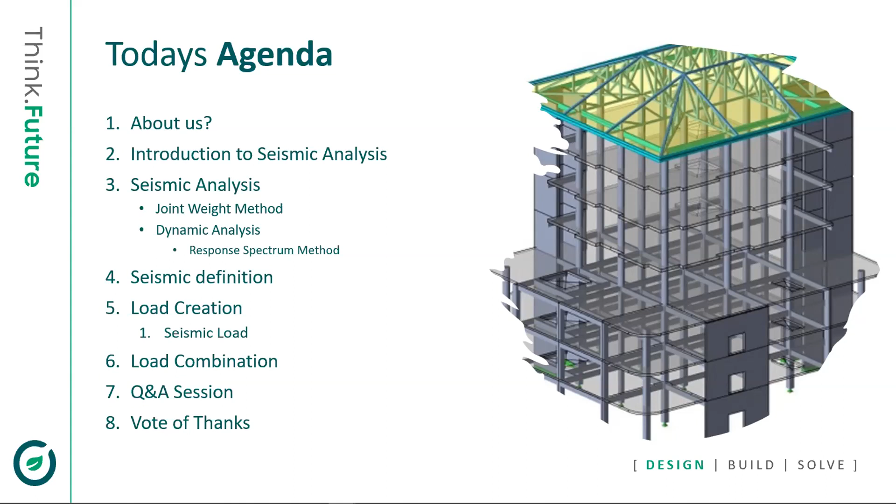So Capricorn Technologies has a legacy of over 3 decades now. Capricorn has played a significant role in the country's computer-aided design adoption, and today we are concentrating on information modeling to address the start-to-finish design and construction difficulties faced by the building and infrastructure industries. We deliver the finest solutions, methods, and procedures to enhance your productivity and reduce your project risk. Our team of more than 250 plus designers based in all the major cities have constantly provided outstanding value, adoption, support, and services to optimize the true potential of more than 20,000 plus customers.

Capricorn Technologies is now a Win0 company. On April 6, 2022, we became a global company with a footprint and impact globally. We have recently merged with 4 international companies: first US CAD from the US, second Cadline from the UK, Capricorn from India, and ATP Technologies from Australia.

So Win0 is dedicated to educating its users about how the technology they employ now can assist them in moving towards net zero in the future and creating a better, sustainable society and greener future. Win0 is known for its inclusive culture of putting people first and passionately resolving customer difficulties. So this was all about us.

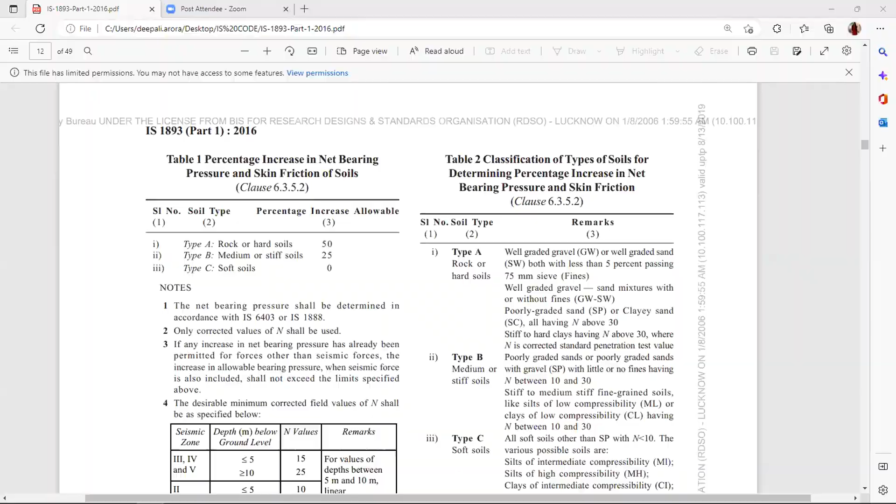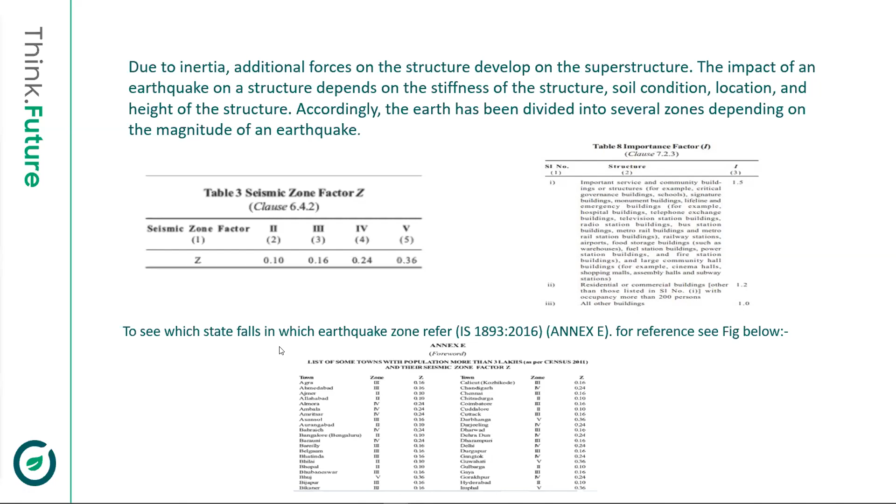So let's start, and I'll directly switch to my software. Just give me a moment to share my software screen. I hope my screen is visible. Kindly confirm. Yes, it's visible.

Okay, so for today's session I have created a G+6 story building. For those attending this session for the first time, in the first two workshops I already covered the basic part, which is assigning the loads and creating the loads, creating the geometry. So to view that previous work, you can go to our YouTube channel as well. All the recordings are available there.

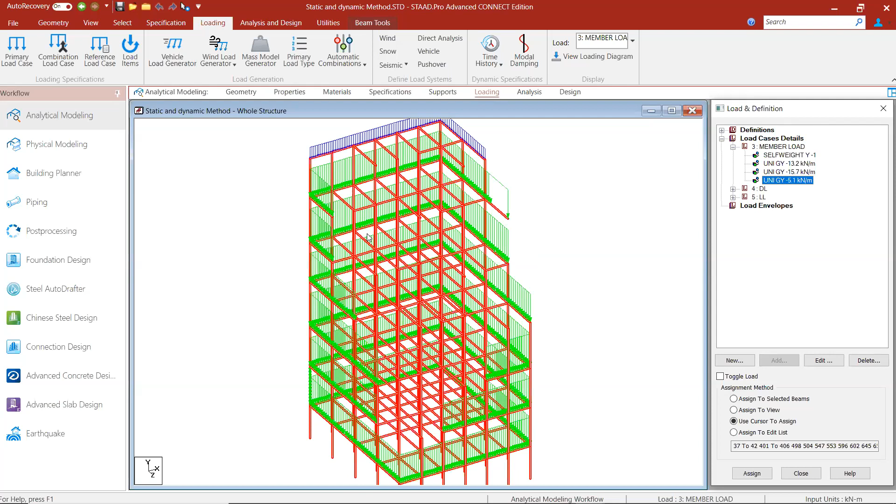So today I'll be directly switching to the definitions part. I have already defined these loads. First is the dead load - member load is nothing but the dead load, so self weight of the structure I've applied. I've applied the wall load, so these are the different wall loads for different floor-to-floor heights, and these are the dead loads. For example, I have kept the load the same, but with your live projects it might not be the case, so I've kept the load cases same. This is for the live load - so all the basic loads I have applied.

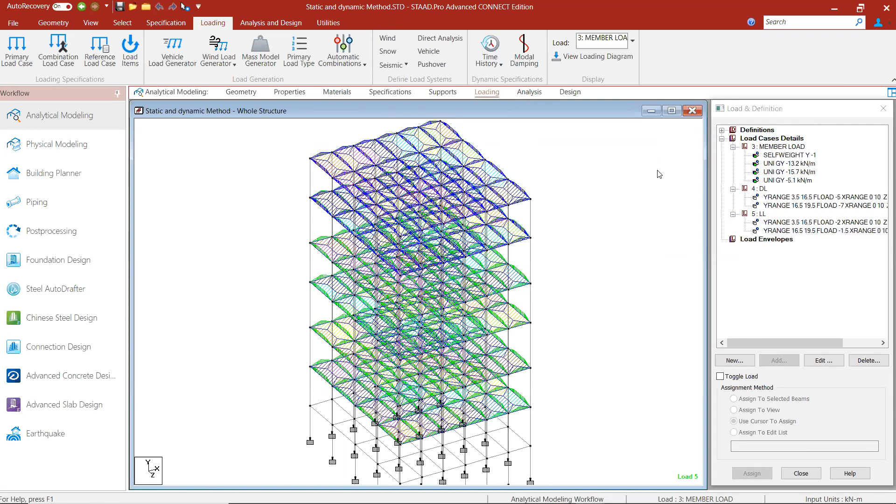Now moving on to the first method, which is the joint weight method. So what I'll do is first assign the supports. I've already assigned fixed supports, but now I'll assign pin supports, because for the joint weight method we need to calculate the weight coming on each node and beam junction. So to do that, I'll go to supports.

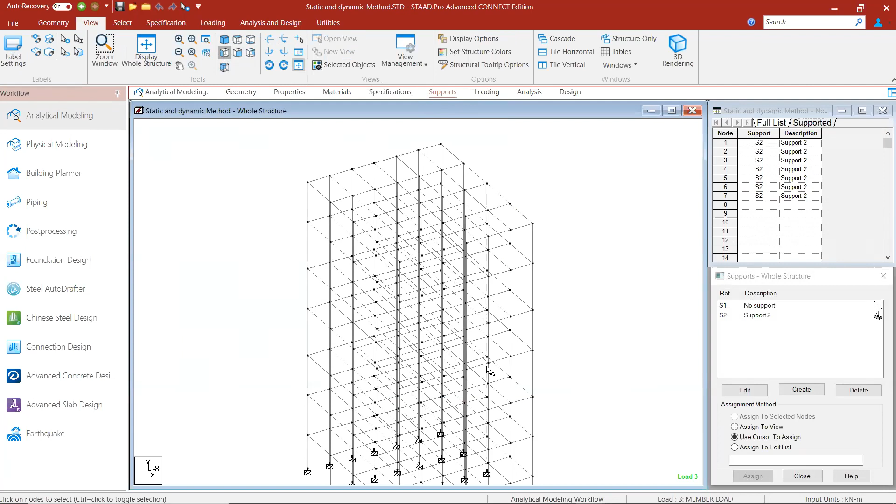I'll click on view and select the left view, and select all the columns. To select all the columns, I've pressed the select ribbon tab, and from the beam section, I'll click on parallel and select parallel to y-axis. Now I'll go to view and select the selected objects.

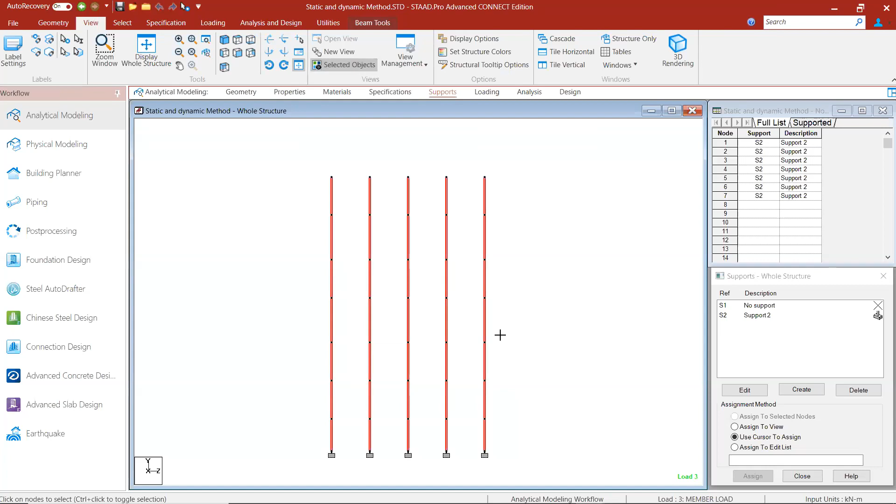Now moving on to create pin supports. I've clicked on supports, and after clicking on create, I'll click on this pin support. I'll add the pin supports to all the node and beam junctions above the foundation level. I'll click on assign and yes. See, all the pin supports have been assigned.

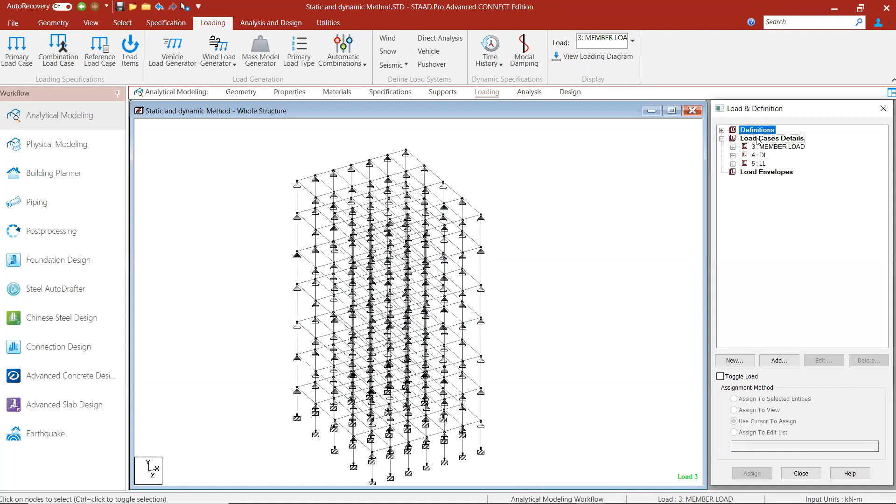Now moving on to how we will calculate the joint weights. To do that, first I'll create a load combination which will combine all these three loads in one. So I'll click on load case detail.

I'll create a load combination by clicking on define combination. I want to keep the load number as 100 and write the name as dead load plus 0.25 of live load. As per our Indian standard code, if the live load or imposed load is greater than 3, we have to assign 50% of the live load. If less than that, we assign 25% of the live load. So I'm taking 0.25 of live load.

It's important to take all these load cases in the same manner we wrote our combination - first dead loads and then live load. Here I'll change the factor, which is 0.25. I'll click on add, now click on close. This load combination has been created.

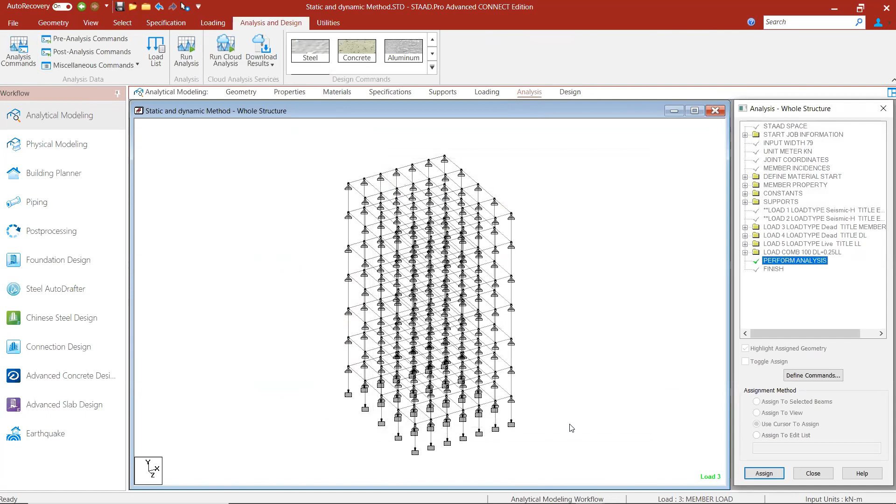Now I'll click on analysis first, and here I will add the command for perform analysis. Perform analysis and close. Now I'll simply run my structure.

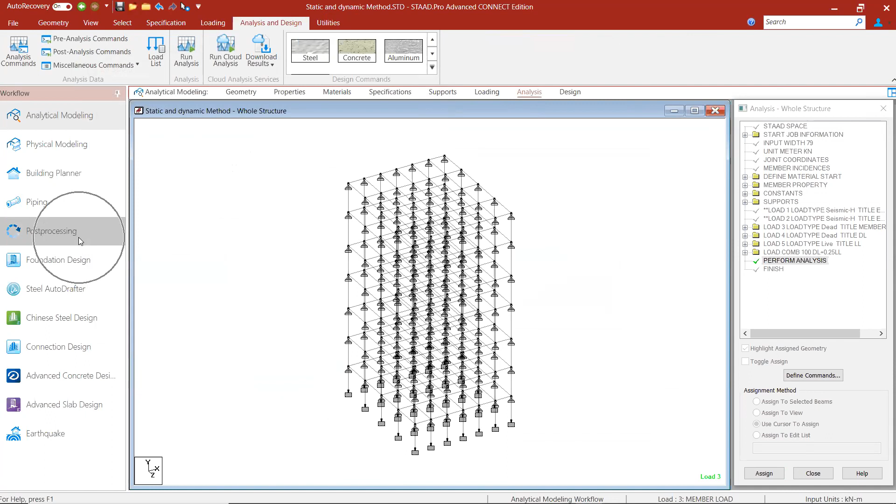Now with 0 errors and 0 warnings, moving forward, I'll click on post processing to see the support reaction table. For the results, we go to post processing. I'll click on post processing, and from here I'll choose the combination we created for joint weights.

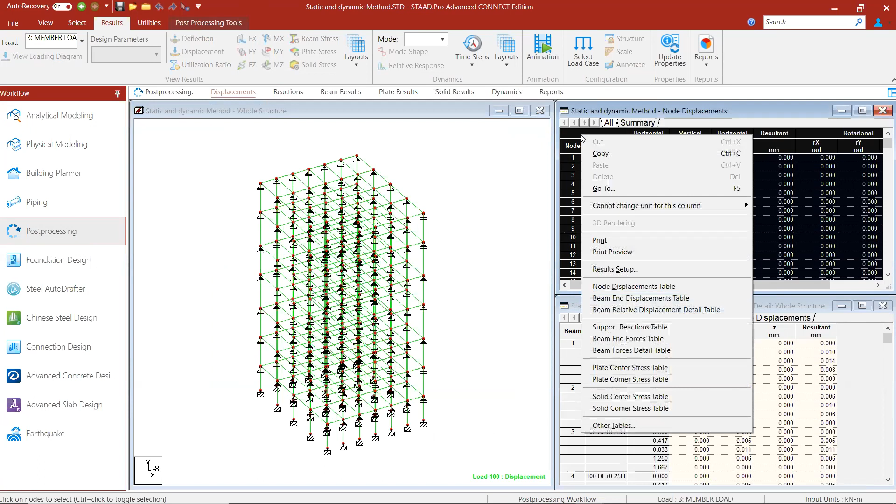Either I can click on this table, and with a right click on the mouse, click on support reaction table, or from the layout option in node results, I'll click on reactions. This is our support reaction table. Suppose I'll click on the support reaction table.

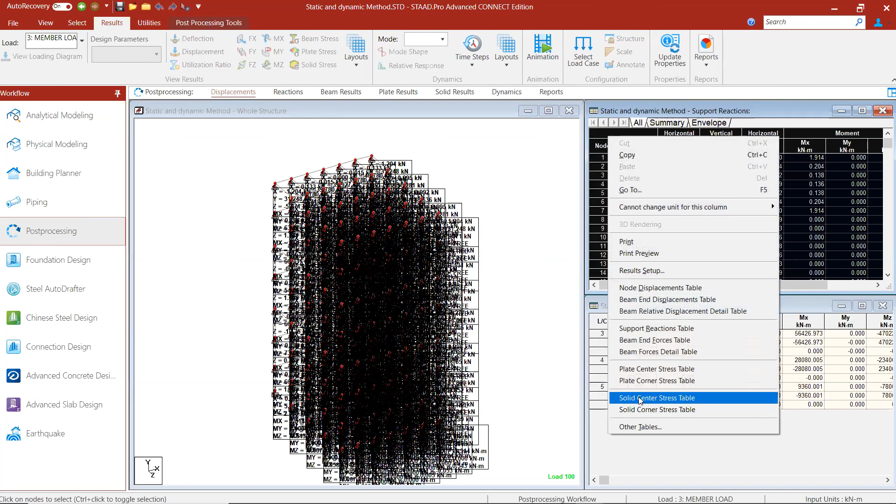I'll click on copy, open my Excel sheet, and paste this result over there. I'll paste these results one more time.

Instead of this load combination, what we have to do is write 'weight' here. Otherwise it will show an error in the STAAD editor file when you try to run the analysis. And for the joint weight, we only need the vertical forces, so I'm keeping this FY forces and deleting the rest.

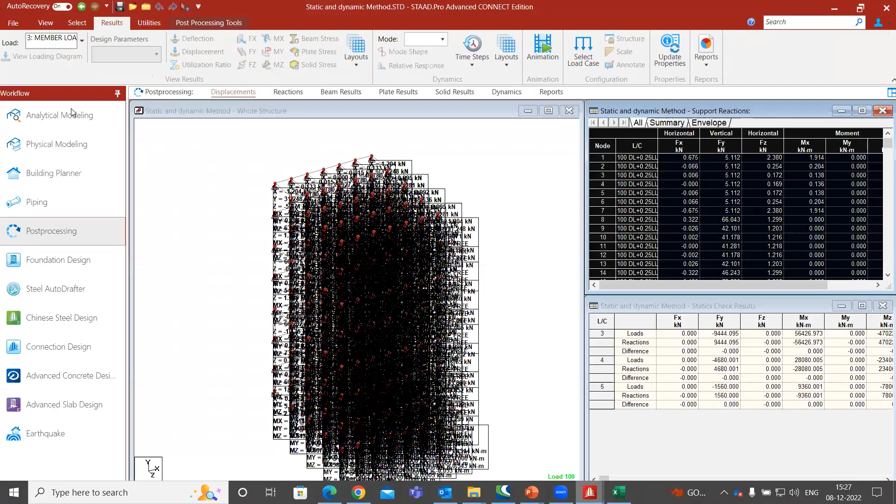So before pasting this in the editor file, we need to define our seismic definition. To do that, I'll open this file again, click on this analytical model, then go to the utilities tab in the command file, or say STAAD editor file.

I'll click on the support first. Now we don't need to have this pin supports option on, so with the comment option, I'll hide it. I have actually already created the earthquake X and earthquake Z load type cases.

I'll explain one more time how we create these earthquake load cases. One thing to keep in mind is we need to define these earthquake load cases before any other load case in order to reduce any errors. So these two load cases should be the priority.

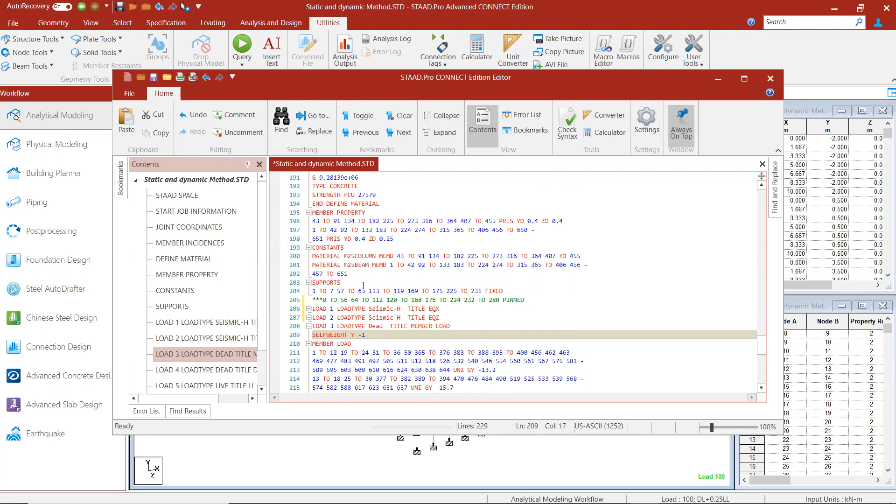Now the question comes as to where we have to define or paste those joint weights. So I'll just save this. Now we will create our seismic definition.

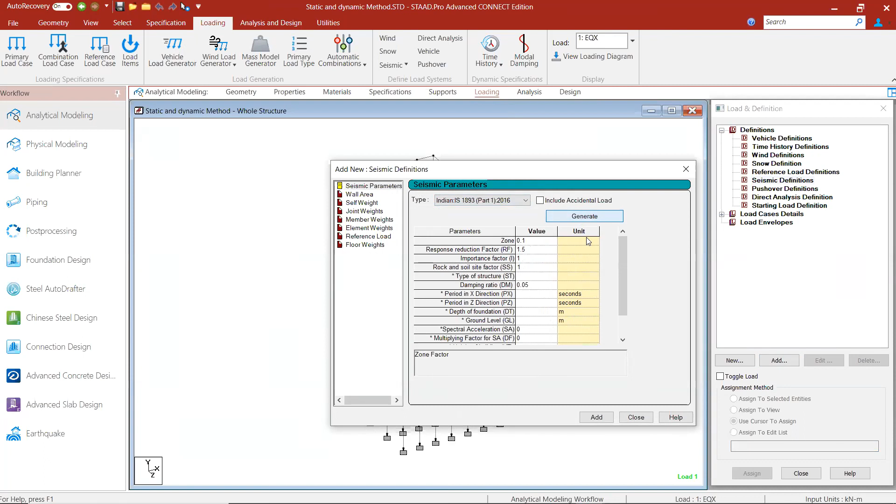In the loading part, click this definitions. From seismic definition, click on this, click on add, select the IS code. Either you can manually put the values here or just click on generate option. Select the parameters, say I'll select Delhi.

Accordingly, all the zones, importance factor, and response reduction factor will be changed as per our selection. Say I want to design for a building with special moment resisting frames, so it is 5, and for residential buildings it's 1.2 as per IS 1893 2016. I'll say medium soil, designing for medium soil, and structure type RCMRF buildings.

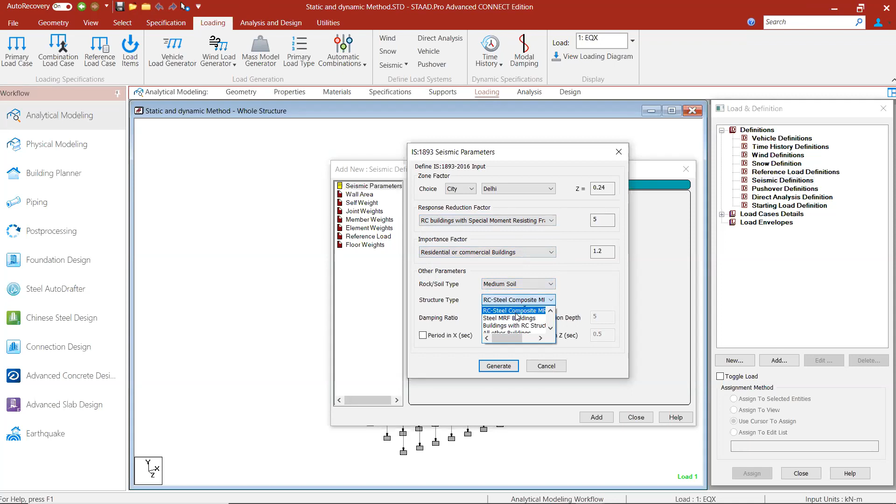Okay, damping ratio 5%, generate. So all those changes will be applied here, and now click on add. Now click on close. After defining this, I'll again go to my command file.

First save the file. Now I'll directly click on this. Just cut it from here and paste it right here, because support should be together, and after that suppose we need to define our seismic definitions. Now after this seismic definition, you have to press enter and write here joint weight, and below this you have to paste your joint weights.

Just copy this, and paste it in the command file like this. And after that, just save the file, close.

File is being processed. Now, if you will see over here, when you click on this definition in seismic definitions, under this zone you'll see all your joint weights.

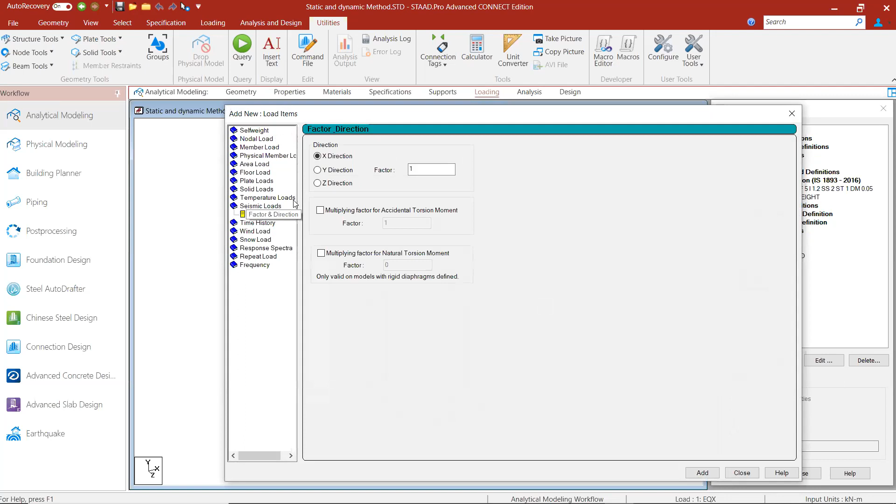So just click on the seismic loads option over here, X direction, add this factor, click on close, and now repeat the process for the Z direction. Select the Z direction, factor 1, close. So we have added this, and this is our joint weights.

Now either I can just show you how to simply run this. So it is showing 0 errors.

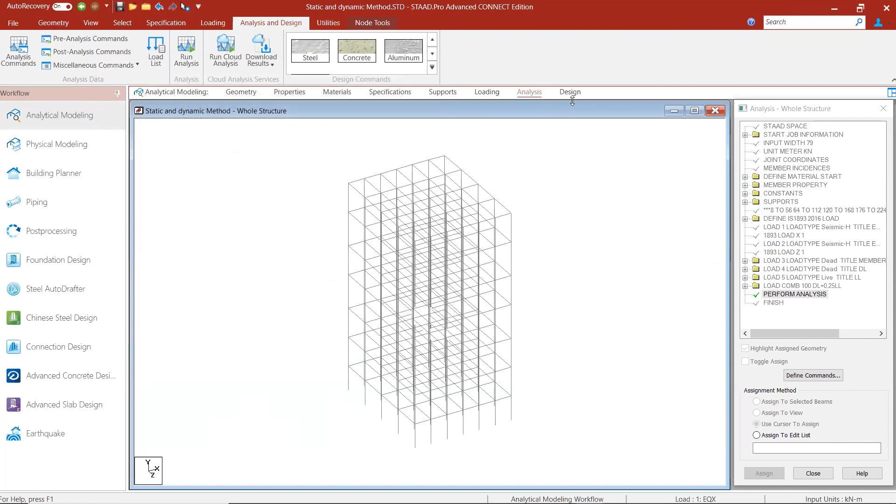So I'll also show you how to define the load combinations, since we have created the earthquake loads as well. To define more combinations, there are basically two types. One is for serviceability load cases, which is used for foundation designs, the unfactored load combinations, and one is ultimate load combinations that we use for beam column designs to check the beam and column designs.

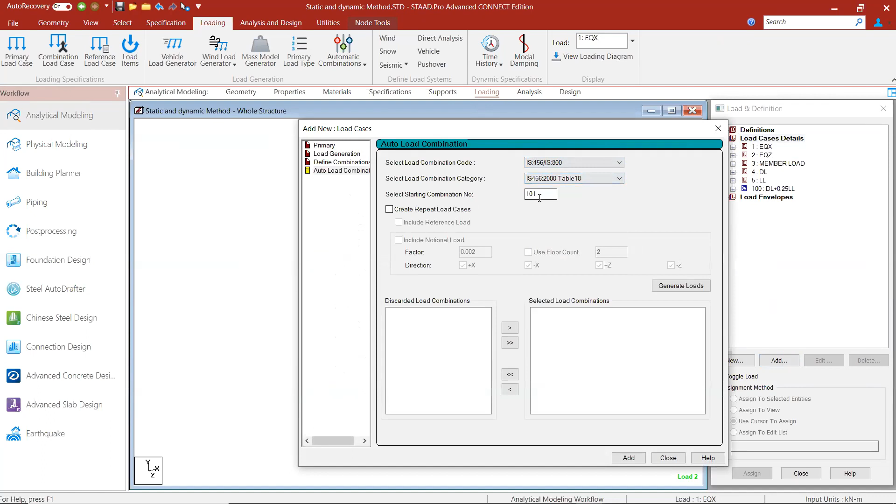Just click on this load case detail, and we'll create the load combination in the same way that we created the load combination before. Either you can generate auto load combinations, just have to select the IS code and it will accordingly define your combinations, or you can keep the starting number as 101. Click on generate loads, so all the load combinations will be created.

Or you can define combination manually. I'll not create too many combinations, just for an example I'll create two load combinations for each, one for ultimate load combinations and second for serviceability. So first we'll create, say, 1.5 factor with a factor of 1.5 of dead load plus live load.

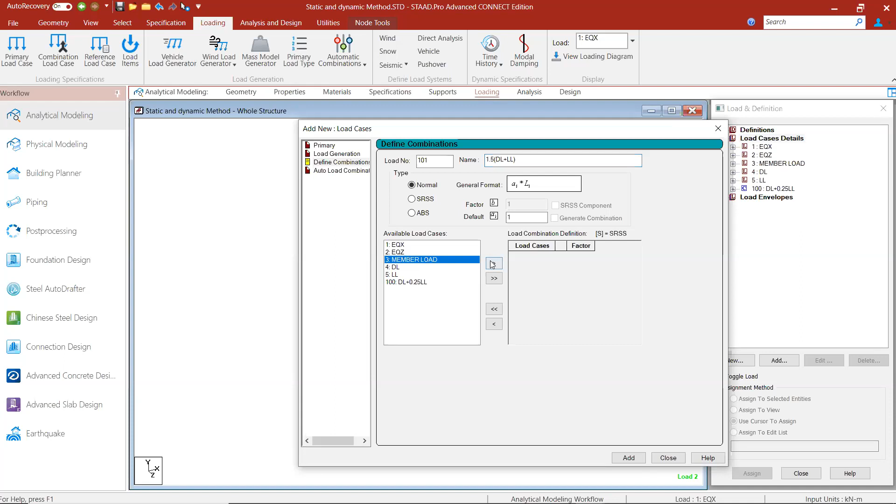So how we will select the load cases? First we will select the dead load, now the live load, and there's a factor of 1.5. So over here in the factor box, we will write 1.5 as a factor. I'll click on add, yes, so this is my 101 combination added.

I'll create one more with earthquake definition. First I'll say 102, and name it as 1.2 with a factor of 1.2 dead load plus live load in positive earthquake X direction. So first I'll select all the dead loads, then live load, and then my earthquake load with a factor of 1.2, 1.2, 1.2, 1.2, and 1.2. Add.

You don't have to create these combinations again and again in new projects. You can use your editor file, doing the cut and copy paste method as well. This is just to give you clarity on how we can create the combinations.

So now moving on to serviceability load cases, which are unfactored load cases. I want to give the load combination as 201, and first I'll create dead load plus live load. So dead load plus live load, click on add.

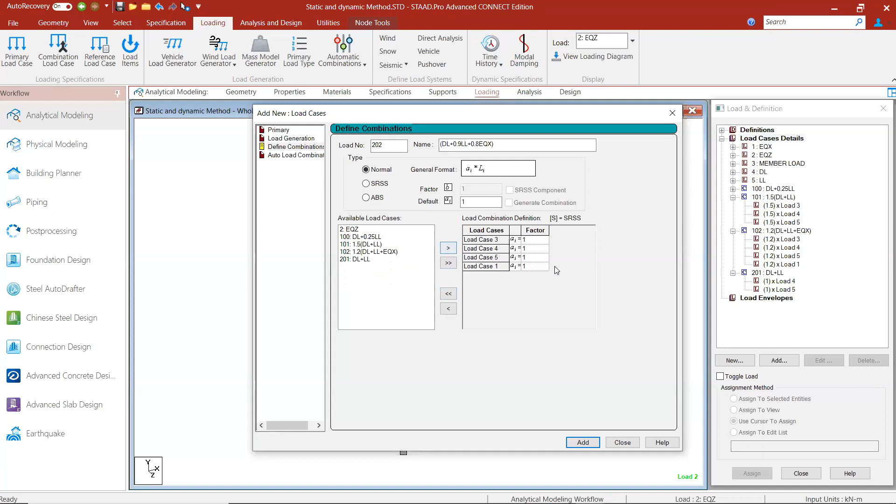Dead load, live load—sorry, I forgot to add member load, then dead load, and then live load, and then earthquake. So live load is our load case number 5. Here I have to write 0.9 as factor and here 0.8 as factor in earthquake X.

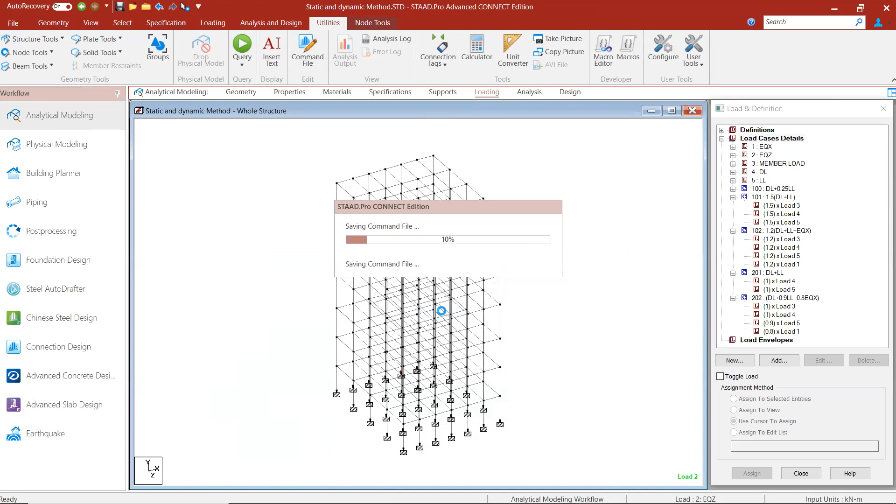I'll click on add. So how we will create or copy paste the load combination using the editor file: I'll click on command file and select this load combination. Suppose I want to create it for the negative X direction also, like negative earthquake X. Copy, I'll paste.

Here I'll write negative, and here I'll write negative as well. This is how you can use your STAAD editor file. Similarly, say copy, paste - sorry, I forgot to change this load combination number. Here it will be 103. Instead of positive, write negative. Here also negative.

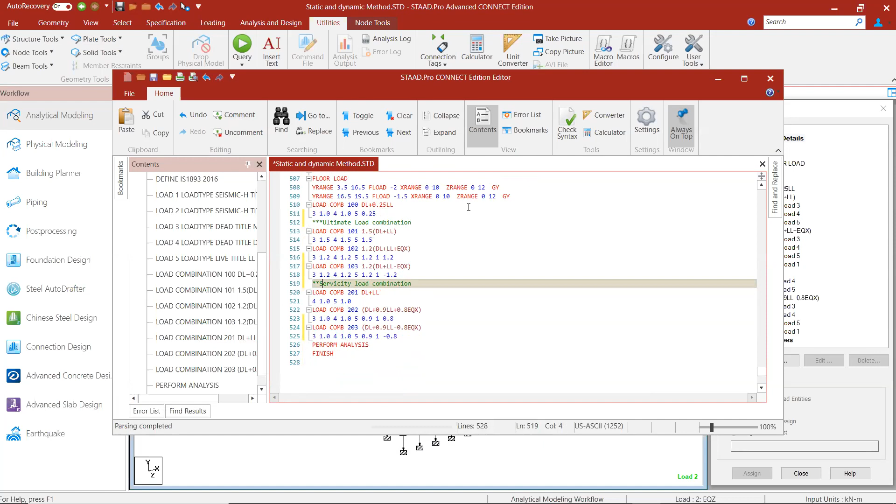Here you can also define these, these are the ultimate load combinations, so you can write the heading here, ultimate load combination, and comment this so that no errors are shown. Here you can say serviceability load combination, and the same way you can add the comment. This comment means these are hidden now. Just save the file.

Now we will define some design parameters. Click on design, click on the concrete option. I'll be using IS456. I'll define some of the parameters like FY main, which is main steel, say 500,000 in kilonewton per meter square. And let's define the concrete strength, say 25,000 in kilonewton per meter square. That's all for this.

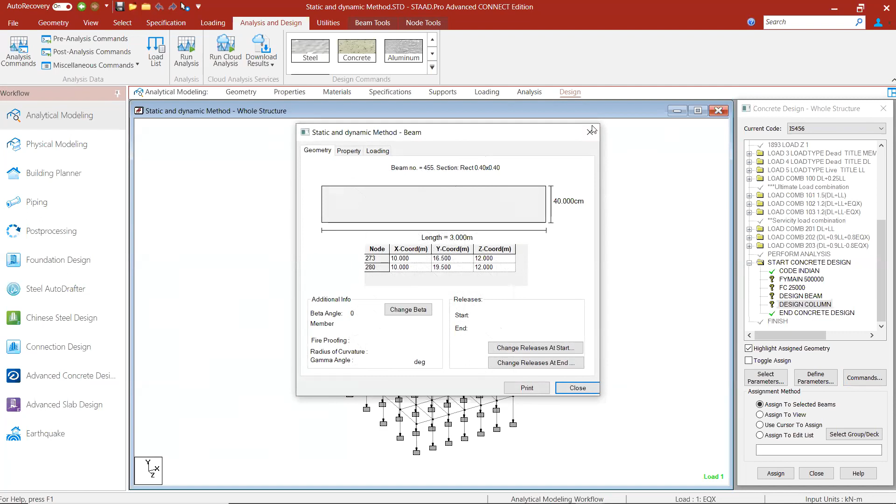And I'll add the command of design beam, design column. I'm adding these commands because as of now, it will not show any result for any beam or column because we haven't designed it. So in order to design it, like in order to get the reinforcement details as well, you need to go to the design option and need to define the parameters.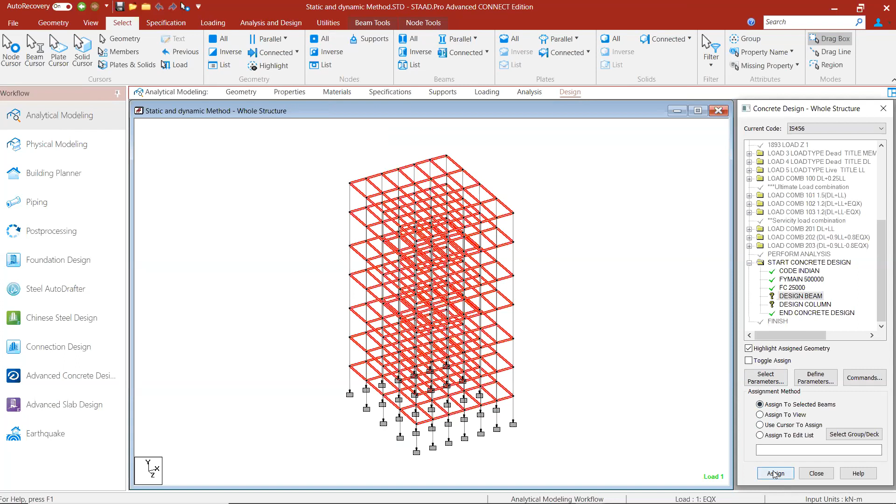Say FY main, I want to keep the same steel in the whole structure, so I'll assign it to the view, and similarly for FC 25,000. For design beam, I'll go to select. I'll select parallel to Y and inverse my selection because I want to assign design to beam, and I'll say assign to selected beams. Now I want to assign and design the columns. I'll select beam parallel to Y and assign to selected beams.

So after completing this, I have shown you how to define seismic definitions and how to create the seismic load, how to define the seismic load, and why we will assign the pin joints and joint weight method. So I'll just run this and go to analysis and design, and run this analysis.

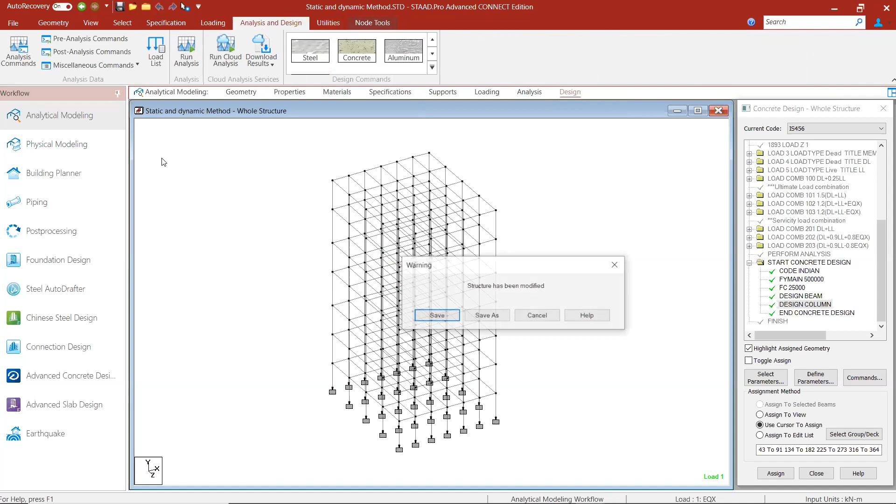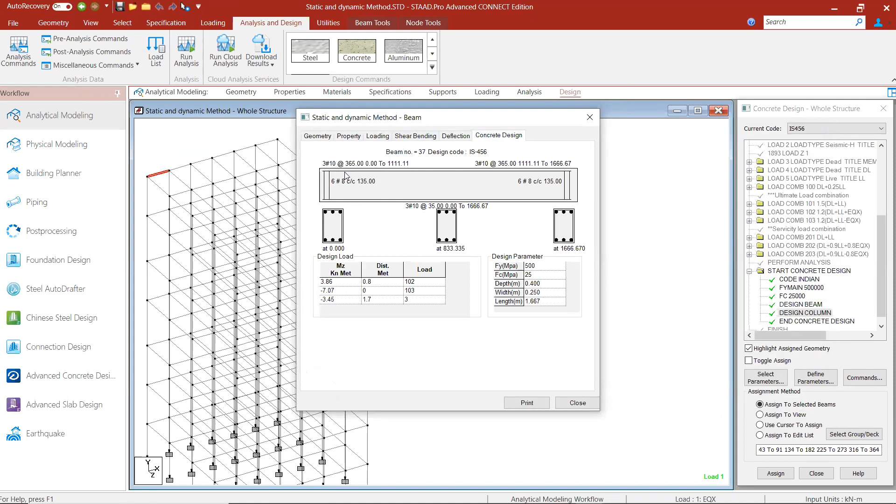After completing the analysis, when I double click on this column, it will also show us the results now. I'll click on this concrete design - these are the area of steel required, percentage, bar sizes. Similarly, for the beams, these are the details we're getting. We are getting 3 of 10 dia steel at the starting point of the beam, and in the end we are getting the similar kind of reinforcement.

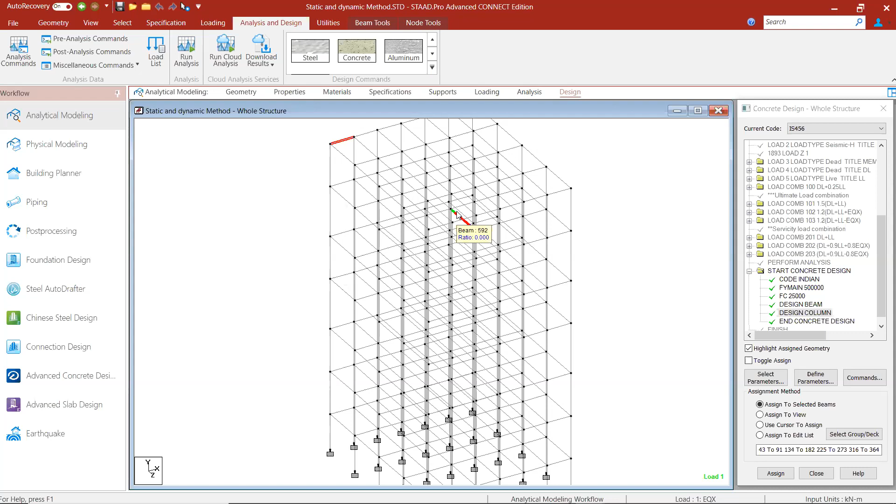Right now I haven't defined more parameters, and I've kept the structure very simple with similar kind of beam sizes and column sizes. But likewise, if you just change the sizes and everything, the results will be totally different. So this was our first method of how we will define our seismic analysis using the joint weight method.

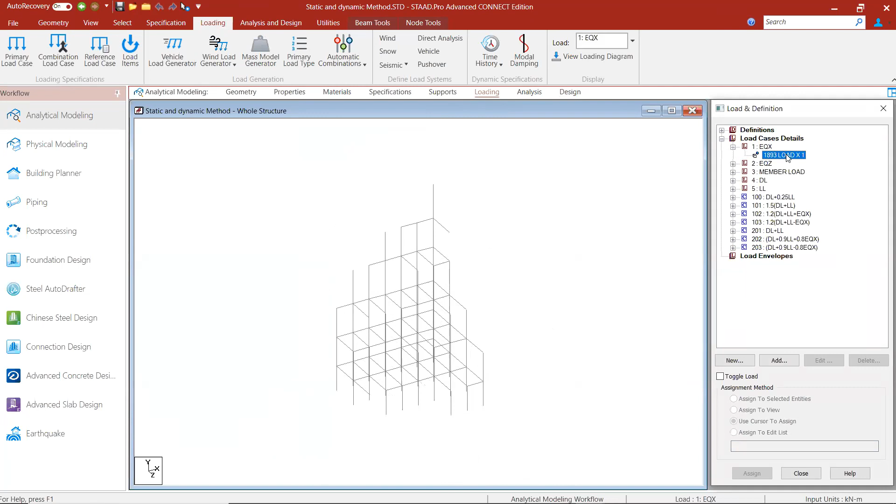And if you want to see your earthquake load cases applying or not, see now these are all applying similarly in the z direction. And it will also be reacting in the negative direction, so we have already created the load combination for that. So accordingly it will act in the z direction and in the negative direction as well, as you can see. Now moving on to our second method, which is the dynamic analysis method.

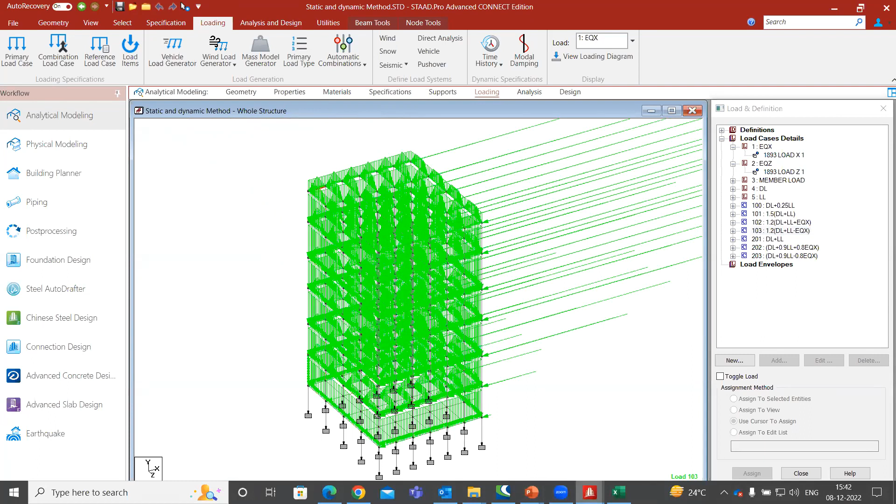I'll just switch to another structure to define the seismic definitions, using the response spectrum method. So I have the same structure with all the same loadings and everything - earthquake load has already been created, member loads have already been assigned. So the only and major difference is that in this we have to match the base shear. Let's see how we will do it.

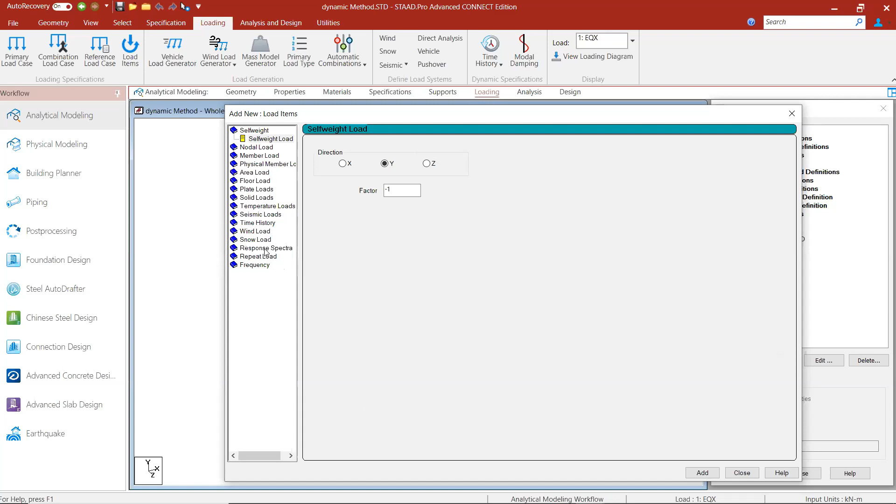First we will define our seismic definition. Why do we need to define seismic definition? Because suppose I've already created this earthquake X load case - when I click on this response spectra, remember, while using response spectra method, you need to define it under response spectra, and while using joint weight method, you need to define it under seismic loads. See, even if I click on seismic loads, it will say seismic definition is required in order to assign a seismic load. Similarly in this also. So first we will define a seismic definition.

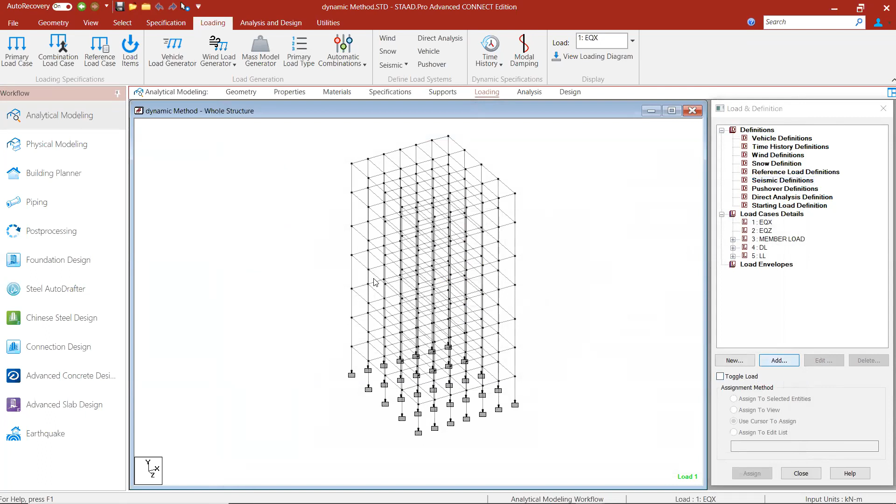I'll click on this, I'll click on add. In the similar way, we'll define our seismic definition. I'll click on generate. I'll choose the city as Delhi.

All other buildings as residential, medium soil. I'll write down these values so I remember them while doing the response spectra, and I'll also explain why I used a reduction factor of 5, importance factor of 1.2, and medium soil.

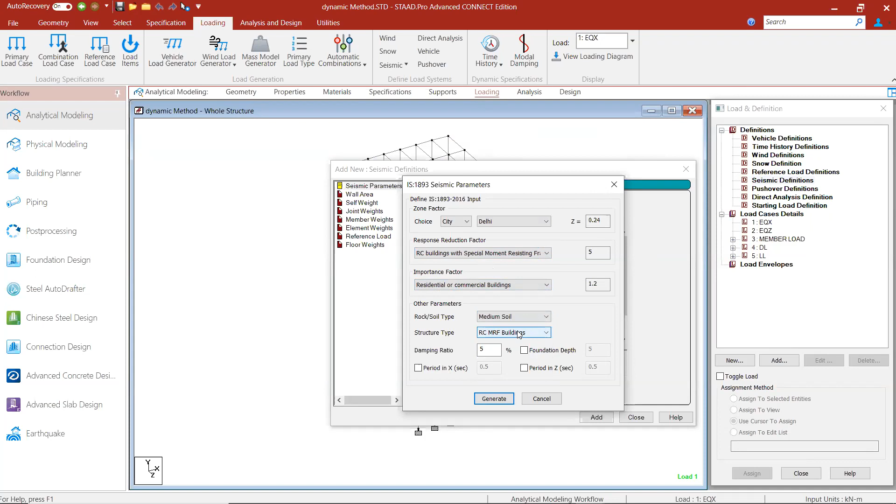And damping ratio as 5. I'll click on generate, add, close, close. After this, similar to how we defined and pasted the joint weight, we have to repeat the same process here as well.

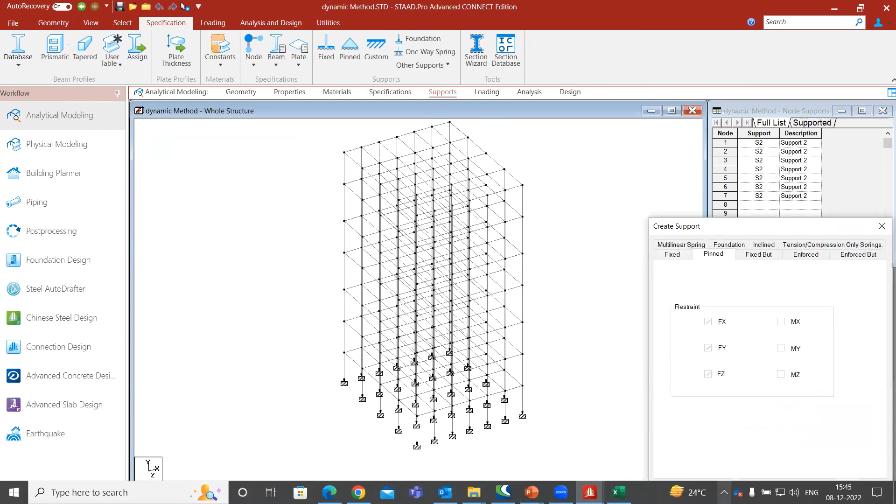I'll go to supports, click on create, add pin joints, select all the columns, view to selected objects, select the left view, and assign the pin supports.

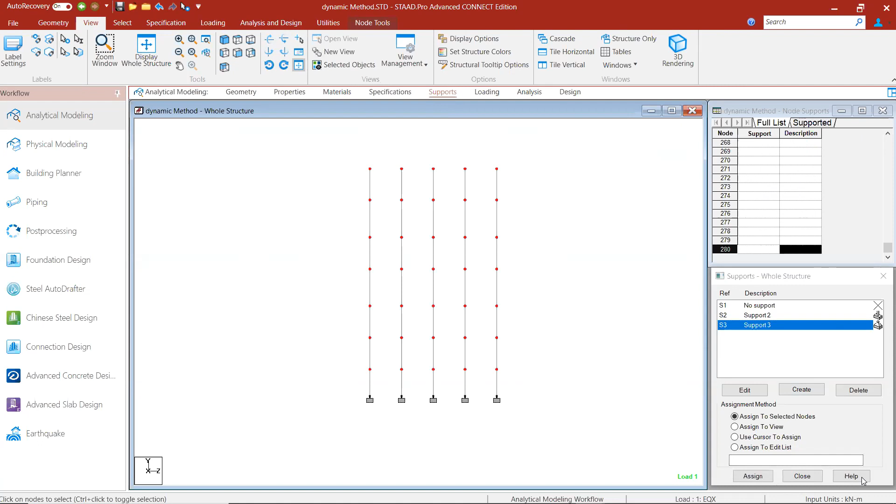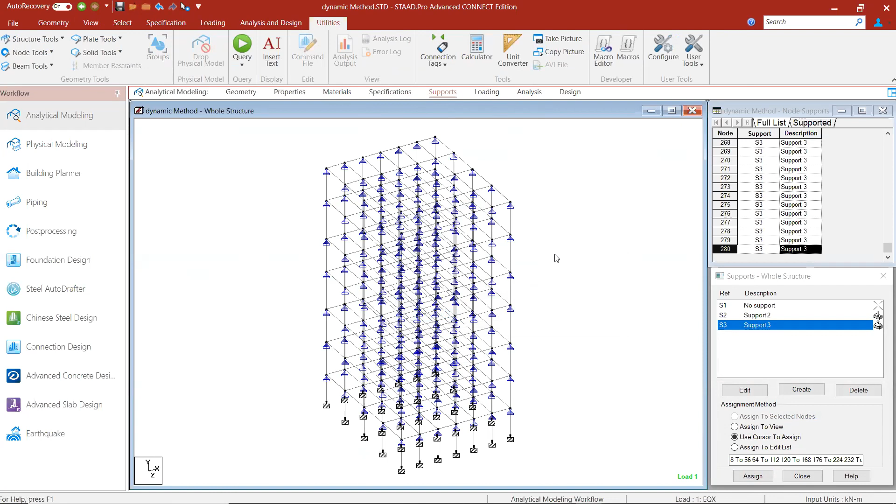Since this is the same structure, there'll be no difference in the joint weight, so I won't repeat this process again. Instead, I'll click on the command file and save. I'll hide all the pin supports. Now under this, I will define the joint weight.

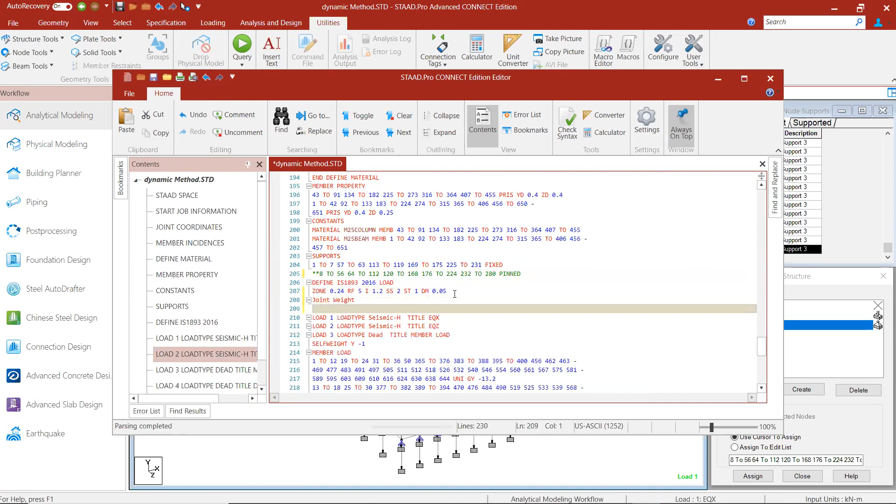I'll paste this weight again, but now we have to paste it in all three directions. In the previous method we only pasted in Fy, but here we have to paste it in all three directions, X, Y, and Z. We'll take the values of the Fy vertical forces but paste them in Fx also and Fz also, using the same values.

I'll write Fx here, copy all these two rows, and paste it here. I'll paste it again here. Instead of Fx, I'll now write Fy and drag it down. Here I'll write Fz.

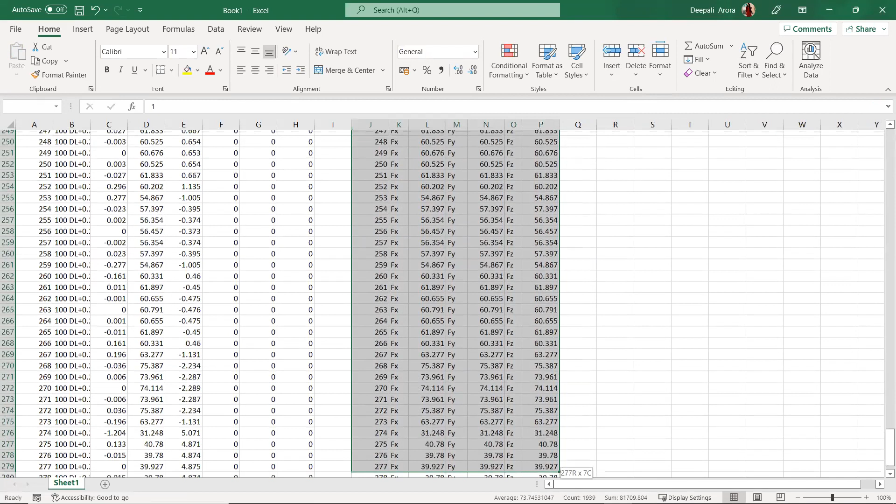We have to consider the load in all three directions while defining our response spectrum method. After doing this, copy all these weights, go to your command file, and paste it over here. Since we've pasted the weights in all three directions, click save, close.

Now go to the loading tab and define your response spectra command. Click on response spectra. Select your code, combination method CQC, subsoil medium, as we selected while defining the seismic definitions.

In the X direction, X is nothing but Z by 2 multiplied by I by R. Z is our zone, I is our importance factor, and R is our response reduction factor. We've taken the zone as 0.24, divided by 2, multiplied by I which is 1.2, and R which is 5. After calculating this, we'll get the value.

Just give me a moment to calculate all this. So after this we get 0.288, 0.0288. And I'll keep the acceleration factor as 1, then add.

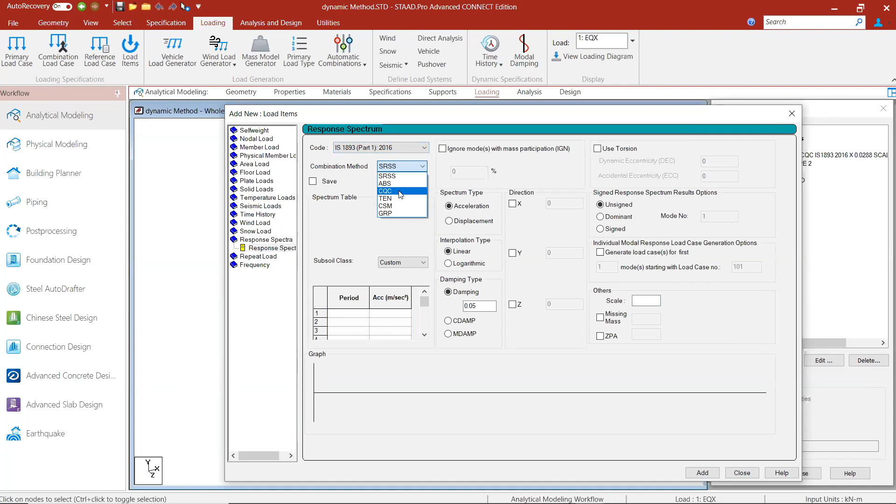Similarly, define the spectrum command here also. Use the code as 1893 CQC, soil as medium, Z will remain the same, and scale as 1, then close.

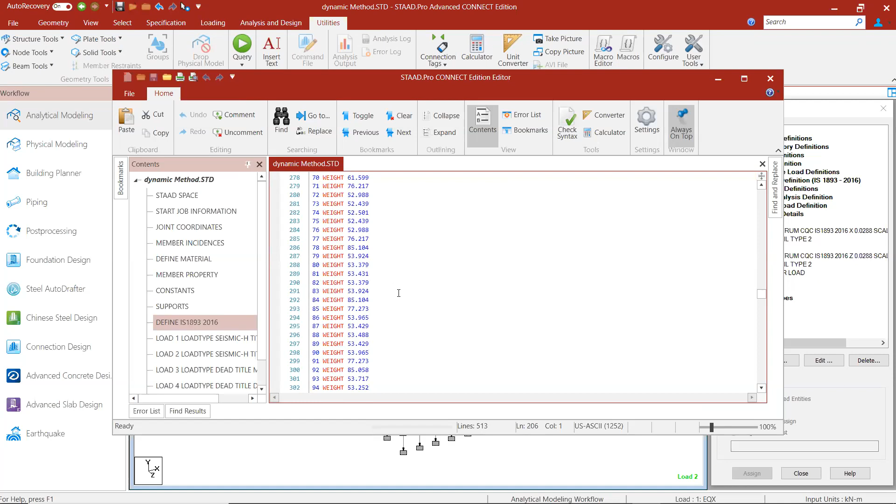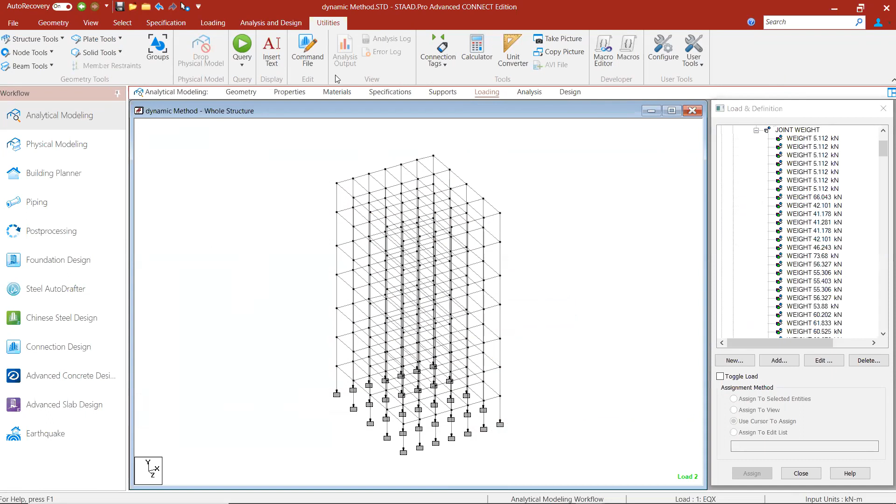First, I'll go to the command file. I think I have pasted it. First I will just close my previous file, because of that I have pasted it somewhere else only, sorry for that.

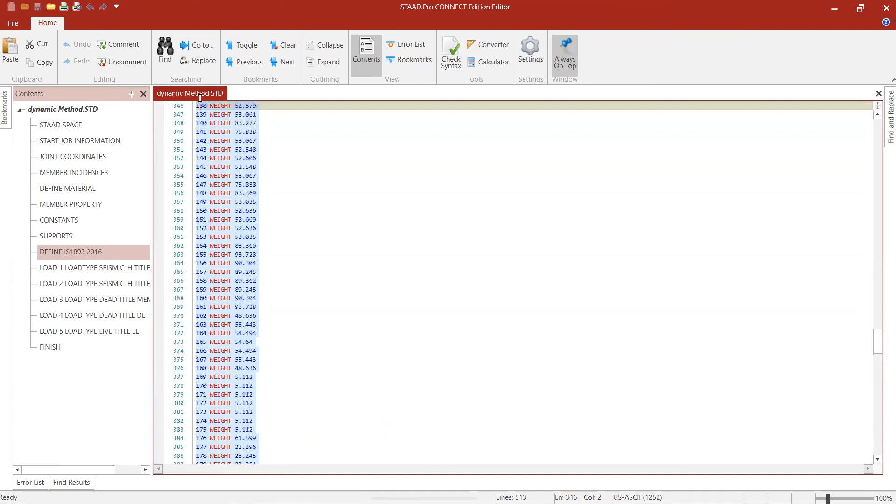Instead of there, we have to define the joint weight in all three directions. So I'll define the joint weight here, as joint loads.

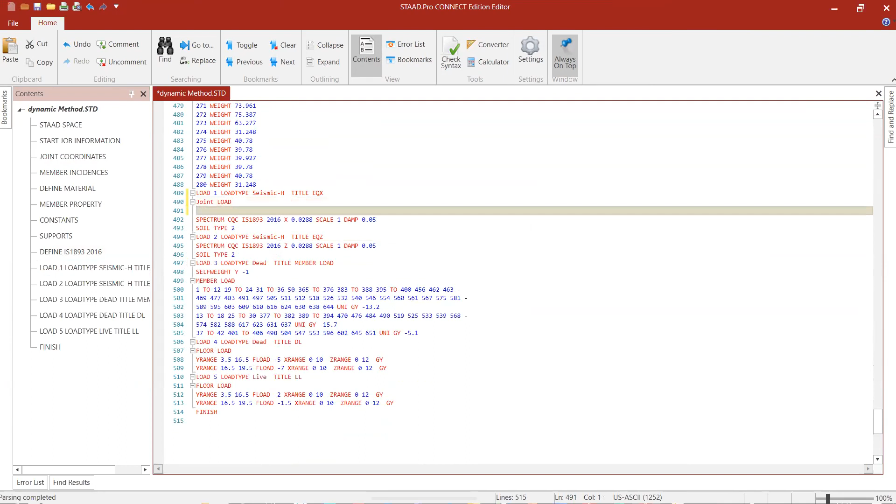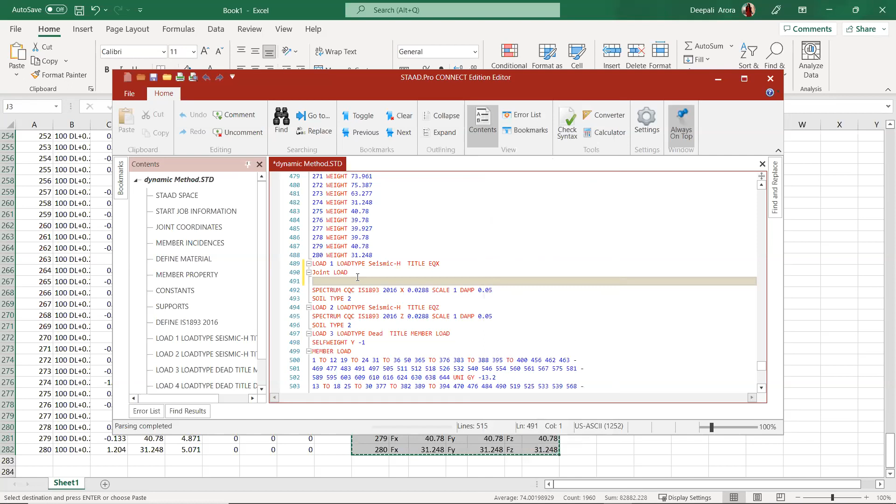And now I will paste all of this. Now I'll paste it over here.

First you have to paste your joint weight under the definition command, and after that, under the earthquake command, you paste these weights as joint load in all three directions. Earthquake Z will automatically take these joint loads from above only. So I'll just save it and click close.

See, joint loads have been added. Now I'll just analyze my structure.

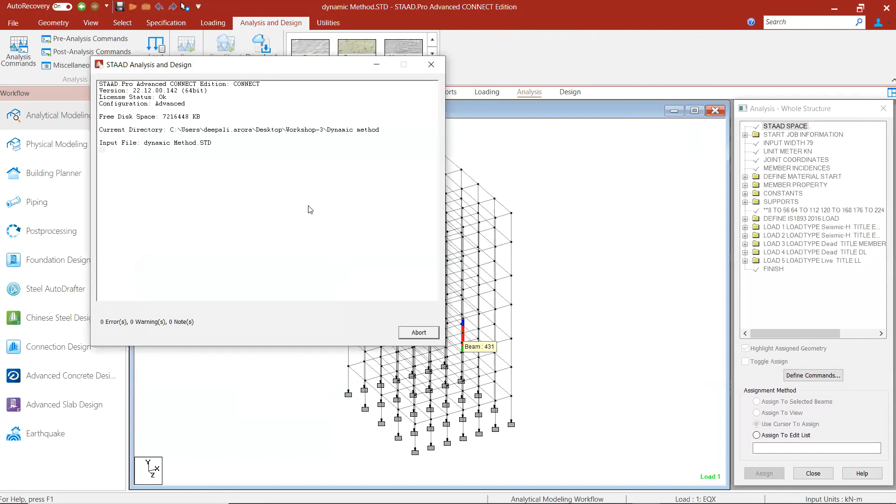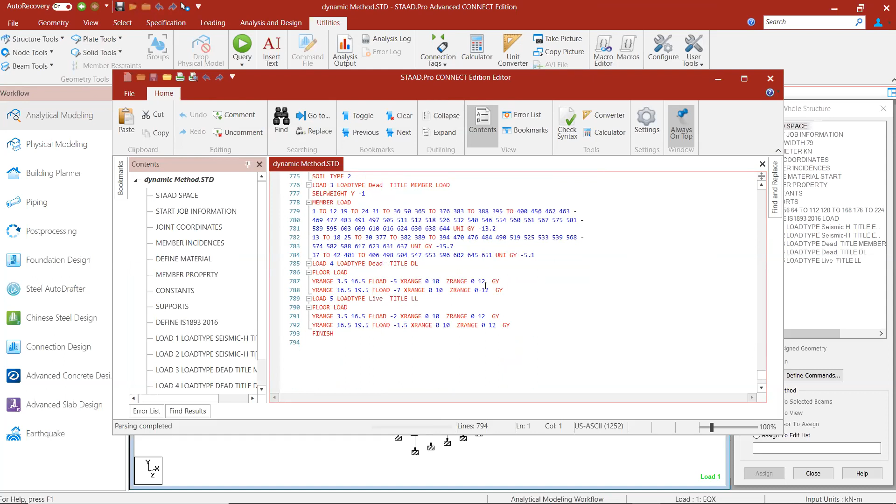There is one error, no issue, we'll see. I'll go to the command file. Okay, I haven't added the perform analysis command, and also I haven't created the load combination because I haven't repeated the same process.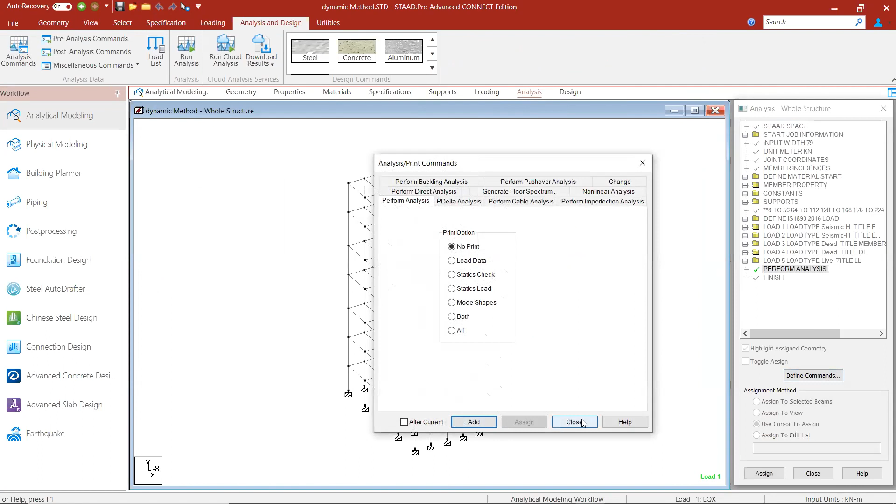So I'll just add the analysis command. I'll go to analysis, define command, add, and close. I'll run the analysis.

So I'll click on view output file. Here you will see base story shear. Just click on this. First, we'll see for X direction. This is for the X direction.

We have to keep in mind this cutoff mode. Like 6 modes get calculated automatically, but we have to define cutoff mode shape factor on the numbers, like sum in X and sum in Z direction, till it reaches 90%. Z is already reaching 90%, but for X we have to define cutoff mode shape. First, we'll do that.

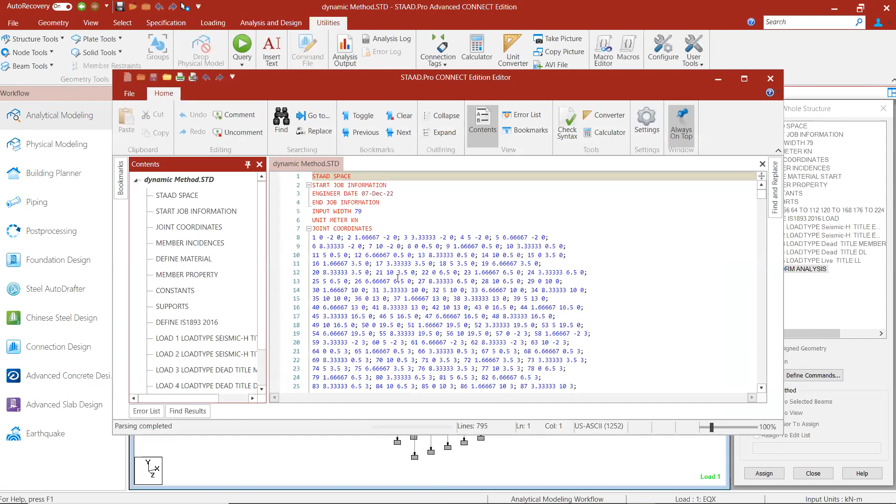What we'll do is go to utilities, then command file. Above this define IS1893 command, we will write cutoff mode shape, say 15. I'll click on save.

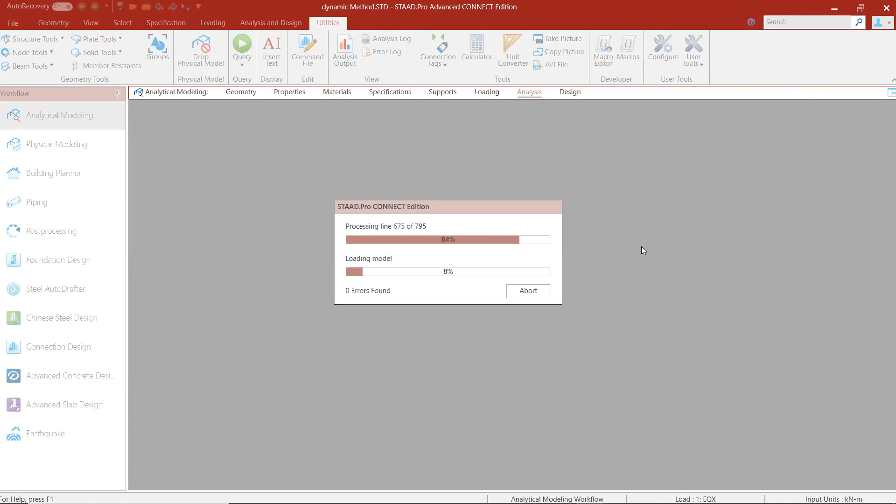And I'll also copy paste the load combinations. So just give me a moment.

So this was my original structure which I'm working in. I have just opened a new structure so that I can copy paste my load combinations.

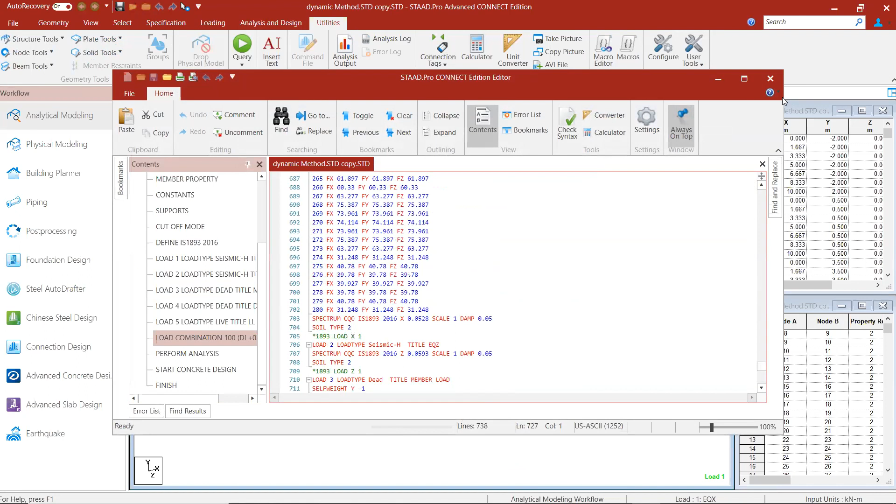So I'll just click on this load case type 1 load combinations. Actually, there are load combinations over here. So I'll open my another file. Just allow me a moment.

Click on view output file. Click on this base story shear. Okay, so as you can see, we only require 7 cutoff mode shapes, because at 7 cutoff mode shapes both X and Z directions are getting 91% of results.

So I'll just write down, this is a warning which is coming: base shear calculated using empirical formula, according to this code it should be multiplied with a factor, so I'll write down the factor which is 1.3345 for the X direction.

And now for the Z direction, the factor is coming out to be 1.4987. So basically we need to match this factor for both X and Z direction, which should come to 1.00 - up to 3 decimal places it should be 0 at least.

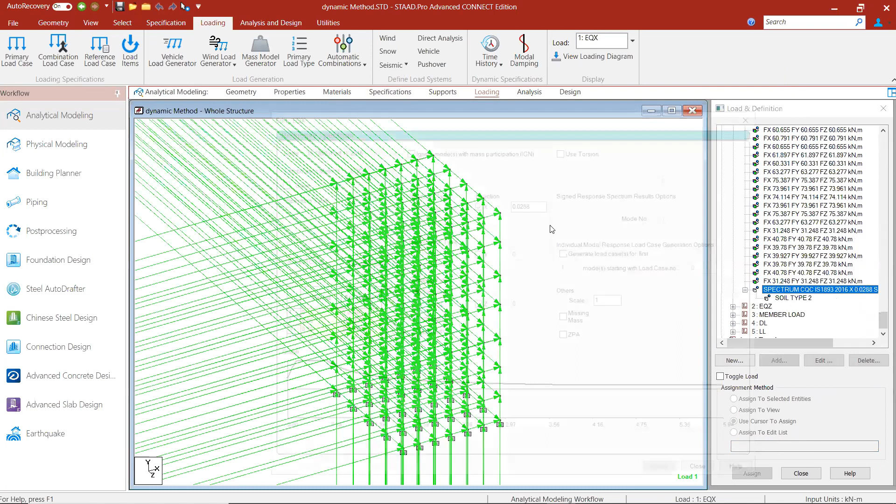I'll close this. I'll go to loading, in load case detail, where we have defined our response spectrum command. Just double tap on that. Here I will multiply the factor which Staad gave me after calculating, which was 1.3345.

So I'll just open the calculator. 0.0288 multiplied with 1.3345 comes out to be 0.038. I'll write 0.038, I'll modify it.

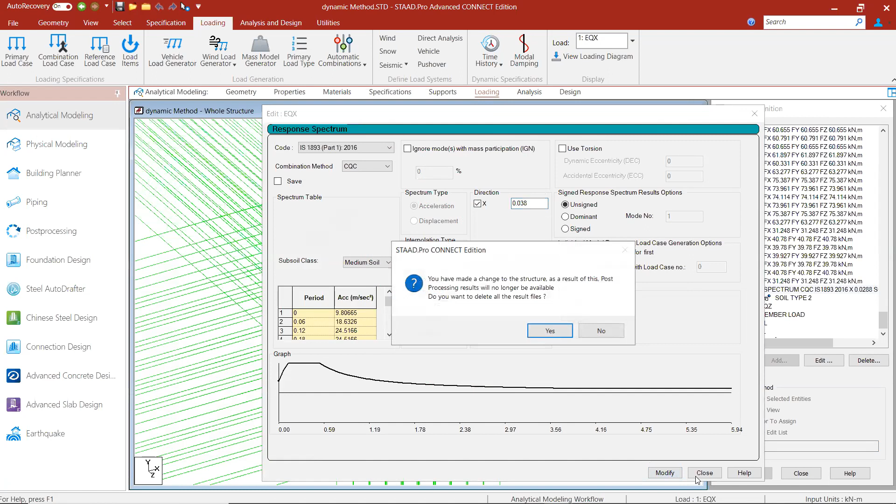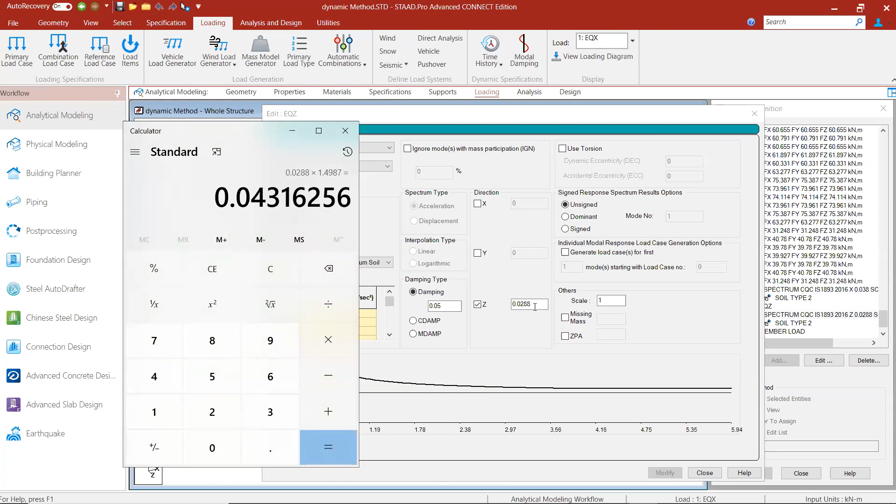Yes, close. Similarly for Z direction, it was 0.0288, factor was 1.4987, which is 0.043. Modify, close. Again, I'll run the analysis.

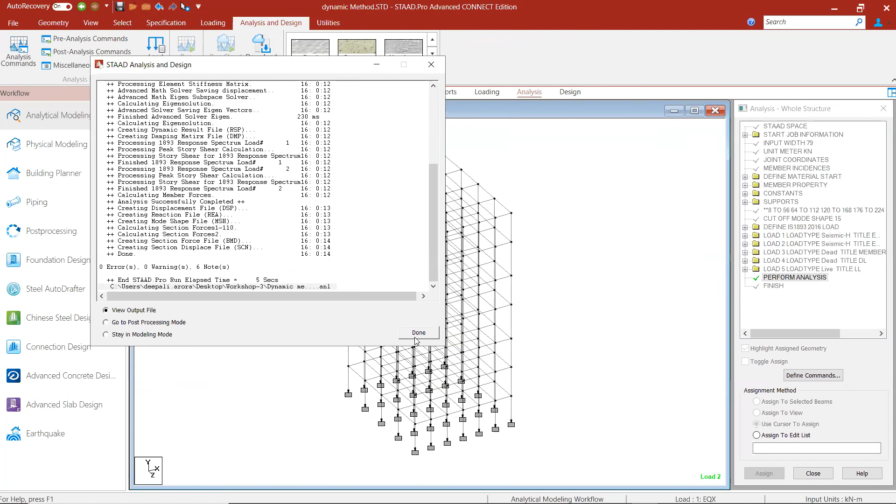I'll click on view output file. Now let's see. Now it is okay, 1.0114. And for Z direction it is 1.0038. So one more time we have to multiply this factor.

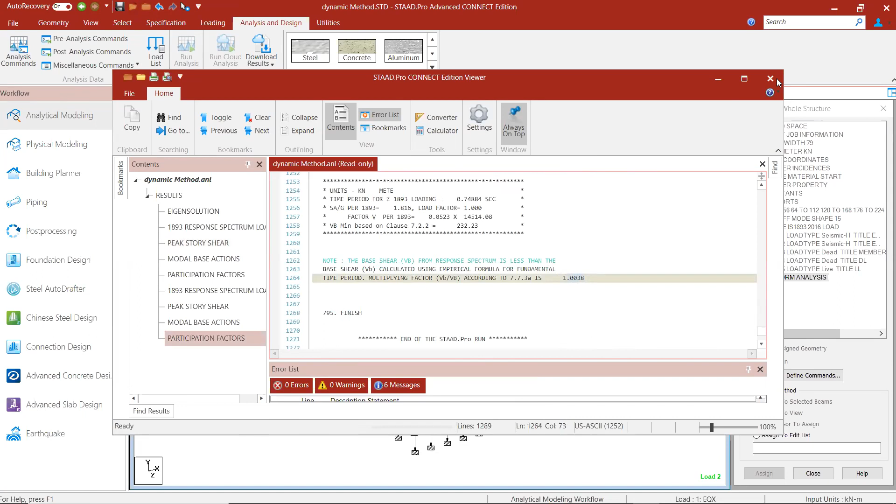So in the same way we have to do this till it comes out to 1.00, up to 3 decimal places. In this we have to match the base shear, and Staad will automatically provide you with the SA by G factor, which is used for the time period.

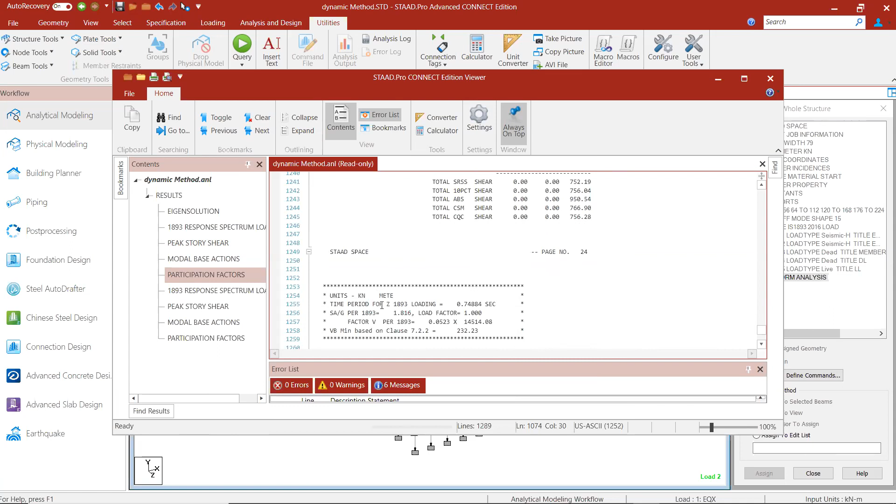If I may show you, this time period for the Z direction is coming out to be 0.74884, and SA by G is 1.816. All your tedious manual calculations have been reduced. Instead of calculating the time period first and then calculating the SA by G factor, you just need to do the following procedure that I have just shown you, and it will automatically give you all the results.

This was about seismic analysis, using first the static analysis method and second the response spectrum method.